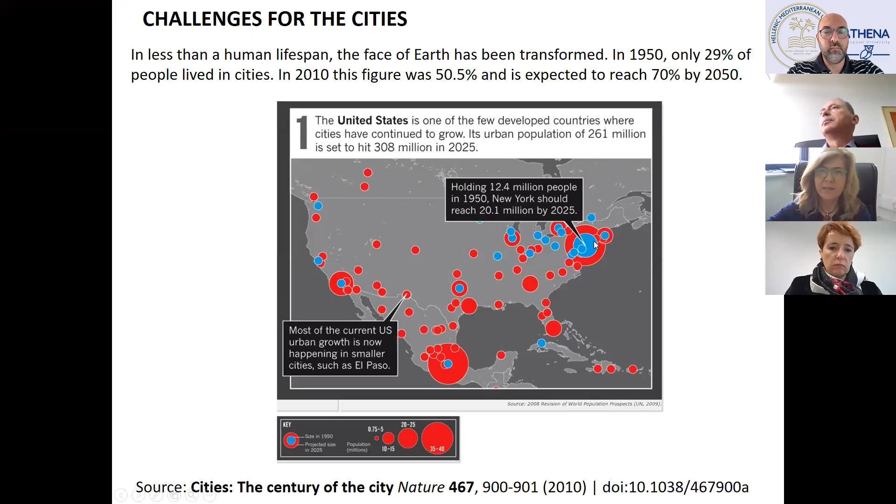I will start with the challenges that we face now in the built environment. First of all is the fact that in less than a human lifespan, less than 70 years, the face of Earth has been transformed. In 1950, only 29% of people lived in cities. In 2010 it was 50%, and it is increasing. You see here, for example, in the US, the blue areas are the cities that existed in 1950, and the red areas are cities that are expanding, showing how the existing cities have expanded in the last 70 years.

All these challenges for the cities create a lot of pressure on the environment. In 2006, the world's cities consumed 2/3 of the total energy used and emitted more than 70% of the energy-related carbon dioxide emissions. We expect this to rise in the upcoming period. So the challenges for the cities are very, very important.

And we saw that also in the COVID pandemic, how cities are affected. So how can we work for sustainably resilient cities?

We should ensure that cities and communities protect and ensure the quality of life, offer income and employment, economic growth, be inclusive and respectful of individuals, of their natural and cultural heritage, become also participatory and collaborative so people participate in the decision-making mechanisms for solutions and policies and services, also regenerative to provide affordable, sustainable and modern energy, support resilience to disruption and risks, and embrace cradle-to-cradle life cycle system thinking and circular economy.

So my presentation will have 4 axes. The first one is data, and how data affect buildings, cities and communities, and the work that has been done in the collection of data in the built environment. Also, the role of smart grids in the built environment and cities, climate change, and how nature-based solutions can provide a solution to the challenges that we face.

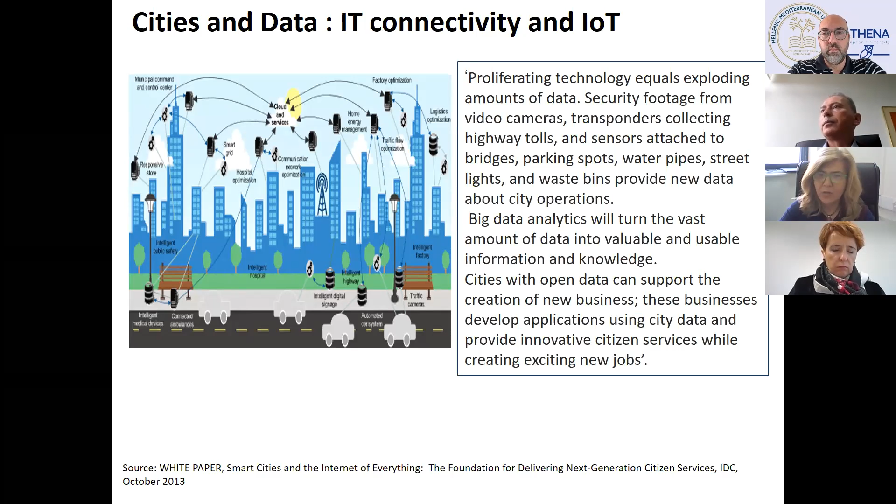Security footage from video cameras, transponders collecting highway tolls, and all the sensors now inserted in our city life provide new data about cities' operations, and new problems and challenges. Big data analytics will turn this vast amount of data into valuable and usable information and knowledge if we learn how to exploit it. This will support the creation of new businesses, and these businesses developing applications using city data will provide innovative citizen services and create new jobs.

To be more specific, I will start discussing the work done in a project called the Horizon 2020 project called Zero Plus. The aim of the project is to achieve nearly zero settlements, buildings in a small neighborhood, using advanced energy technology. There were three objectives.

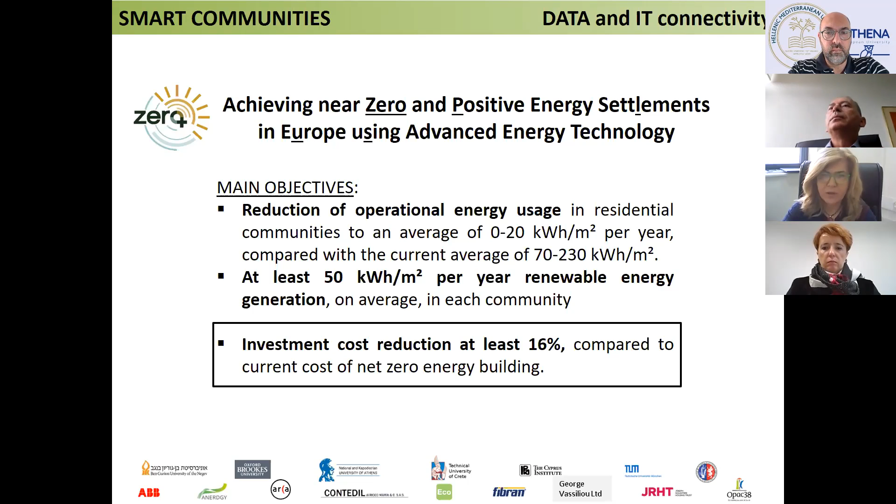The first is to reduce the operational energy of residential communities to an average of 0 to 20 kilowatt hours per square meter per year, compared with the current average of buildings of 70 to 230 kilowatt hours per square meter. At least 50 kilowatt hours per square meter per year of renewable energy generation in these small communities and buildings. And this to be done with an investment cost reduction of at least 16% compared to the current cost of new net zero energy buildings and communities.

For the role of data in this, we designed for this project an open WebGIS platform, not tied to a specific vendor, but using open tools. We have four case studies around Europe constructed in the framework of the project: one in Italy, one in the UK, one in France, and one in Cyprus. In Greece, we couldn't have a case study because the construction industry was affected by the crisis.

We have various measuring devices from various technologies that we integrate into this database. We have intelligent models, key performance indicator calculations, and these are also presented with a front end to the end users. I will talk about that in a few slides.

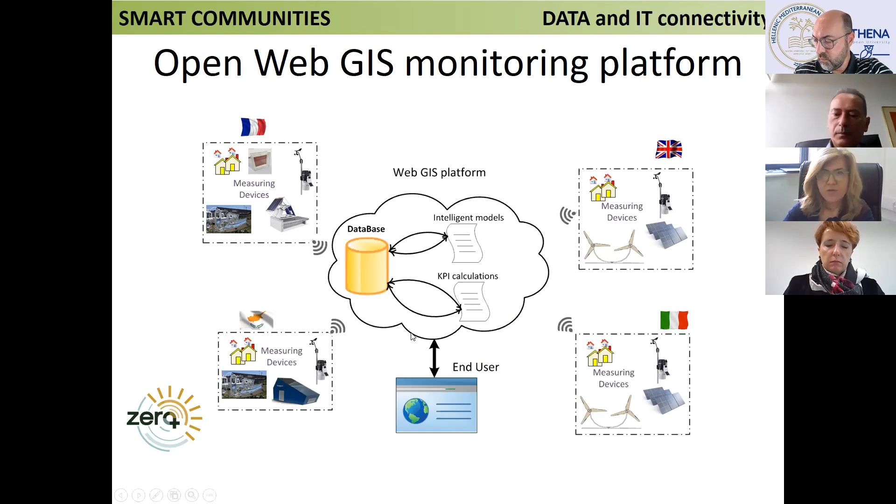What are the innovative technologies that we can include at the building and settlement level? First of all, we have advanced building envelope components, which in our case were a photocatalytic insulation put on the outside of the facade with photocatalytic components, and also some photovoltaics called SB Skin that produced energy from the facade.

Then we have energy production technologies, various aspects. For example, this is called the wind rail, which on top has energy production through photovoltaics but also exploits wind flow through a turbine included here. This is installed on a roof and is called the wind rail. Also, Linear Fresnel solar collectors and other technologies.

Then we have thermal energy storage using various systems. For the building sector, we have advanced heating, ventilation, and air conditioning systems, as well as smart controls and monitoring of the indoor environment. All of these are integrated into an integrated resources management system where we have the inverters, the distribution network, the microgrid, light control of outdoor lighting, and a low voltage distribution network using Wi-Fi to connect the outdoor environment with the buildings.

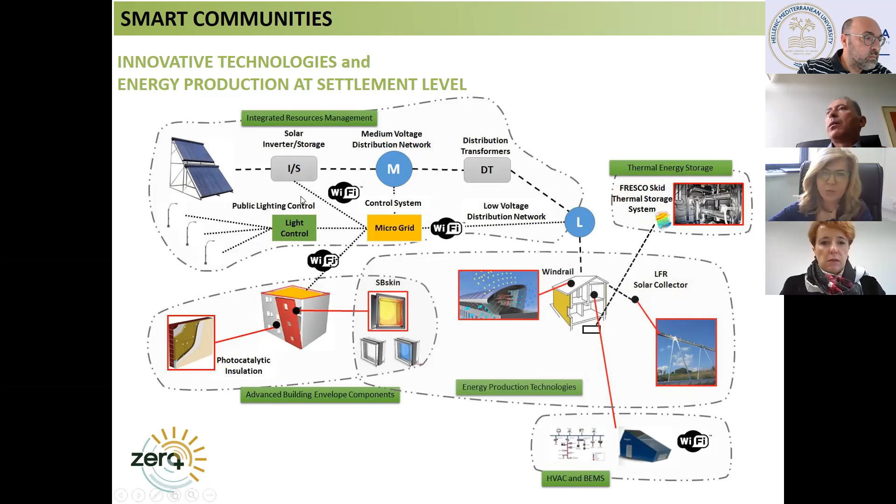To be more specific, you see here the SB Skin, shown in three pictures, which is a multifunctional building panel for energy saving and production in roofs and facades. It is patented as a high insulating glass block, so it has insulation in the back and small photovoltaic panels on the front. It comes in different colors and is modular, so it can be assembled in different ways.

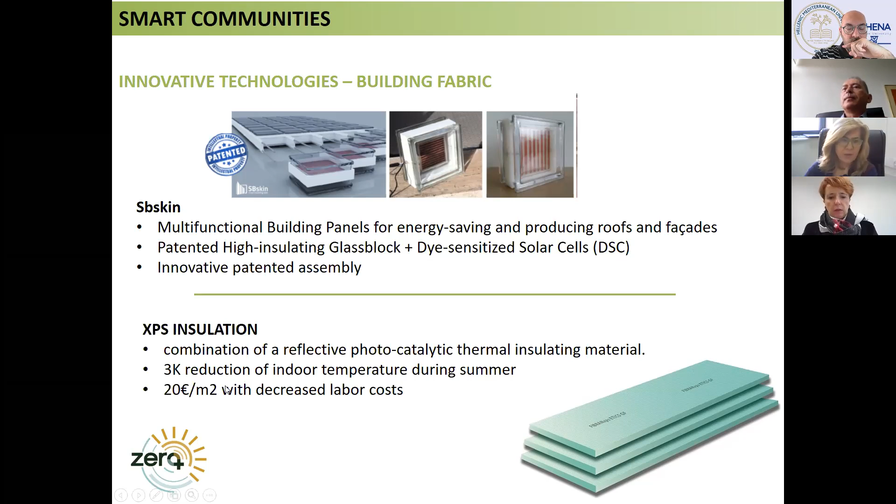This is also the XPS insulation, which combines a reflective photocatalytic thermal insulating panel. During summer, the indoor temperature can be reduced by at least 3 degrees compared to conventional building construction. This costs 20 euros per square meter.

I talked about that. This is a wind rail provided by a specific company called Anergy. As I said, the air moves through the system, there is a turbine that is moved and produces some amount of energy from the wind—although not much, it's very well integrated into the built environment. You also see here the roof and the photovoltaic, high concentrating photovoltaic production.

This is the Fresco, a desiccant and evaporative cooling air conditioning system designed for ventilation, dehumidification, and cooling in small scale applications. This was prototyped and tested by Enea, which is an Italian Ministry of Economic Development project.

The energy management also had Wi-Fi, smart controls of the environment, and ways to show the environmental conditions, interconnecting the systems with the users to provide information to them. All these are connected through the WebGIS platform.

At the settlement level, we have occupancy, temperature, electric loads, air velocity, magnetic reed contact doors, domestic hot water, and all these are connected with the WebGIS platform using a REST API application. We took various vendors and various systems and energy technologies and sensors.

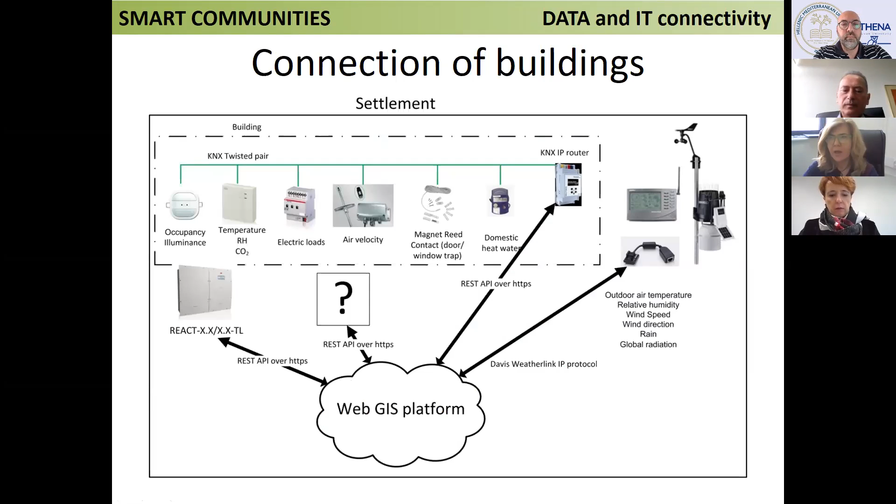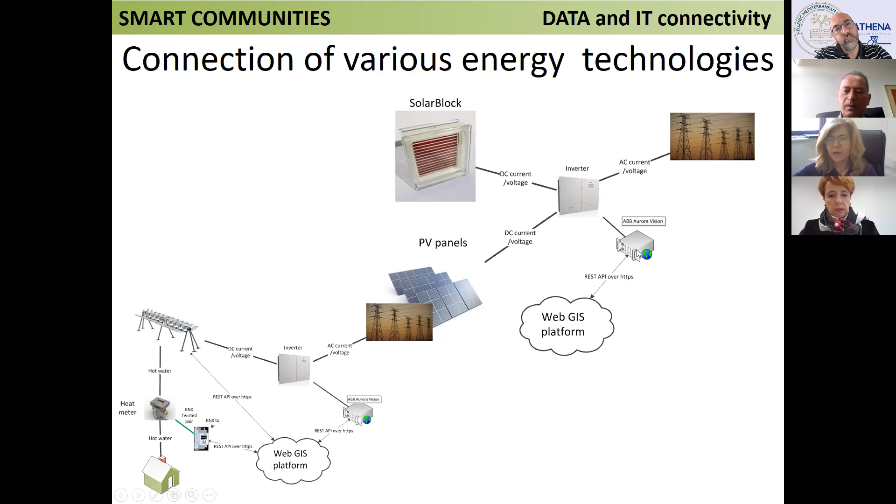We managed to interconnect them all to the WebGIS platform, so we have a global monitoring platform to collect all the data and compare it between the various case studies. The same happened with the energy technologies, with the REST API platform. This is the interconnectivity of the various energy production technologies, through the inverter with one connection, giving us interconnectivity with the WebGIS platform.

What we measured and what we calculated: first of all, we wanted advanced technology and advanced algorithms to predict the energy production and energy consumption at least 24 hours ahead, in order to be able to perform some adjustment of the loads.

For the energy production technologies, we measured the energy produced, the rejected energy not used by the settlement, the energy consumption of the various buildings, the global solar radiation, the wind speed, and the same for the other solar blocks, the photovoltaic insolation, and the photovoltaic panel data. All this is inserted in the database, calculated, and presented through a web browser to the users.

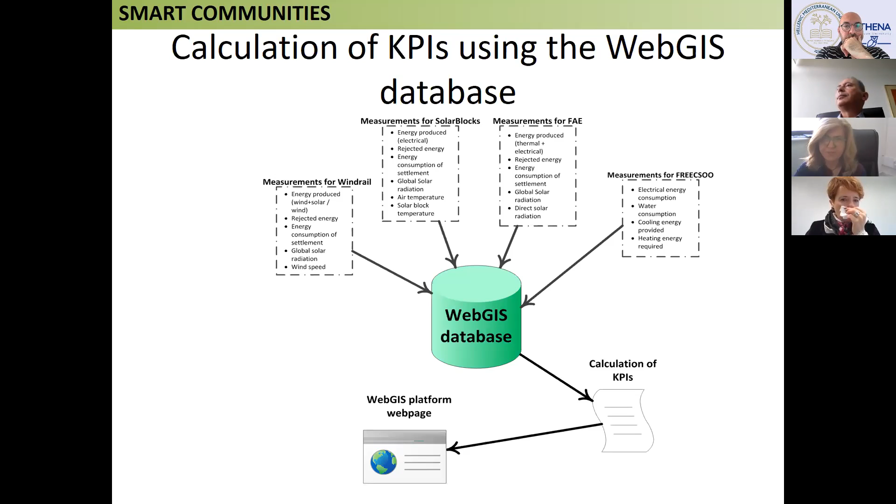We used GIS, although it was a big tool, because we wanted it to be expandable, to be able to include more settlements in the future, and also to use this platform for other projects and applications. I will talk now about one case study in Italy.

These are the two buildings, the area. These were constructed in the framework of the project—it wasn't existing, and we didn't just do retrofitting. These were constructed, which means we had to take all the permits, all the plans. It was very, very heavy work.

You see here the total floor area of the two residences, the net floor area, the orientation, two stories for the first one, one story for the second one, three bedrooms, and then the characteristics of the walls, of the roofs, U values, the windows, Ug, and the glazing we used, and manual blinds for the shading.

These are after construction. I have pictures also during the construction. You can see also on the website more information about that.

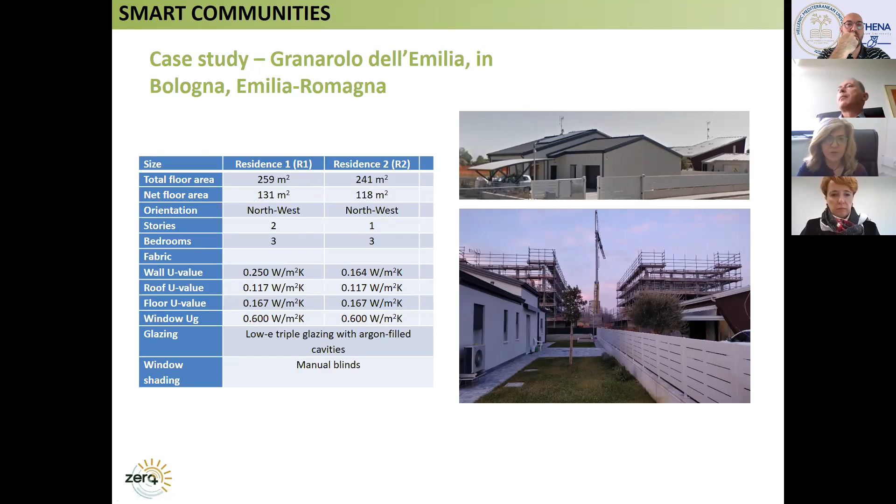So the technologies included dedicated greenery for local overheating mitigation, because we are in Italy, and we thought greenery would help reduce the outdoor temperature in order to reduce the energy consumption of the buildings by minimizing the difference between indoor and outdoor conditions, especially during summer.

We had PV panels, as explained in the beginning, XPS insulation, energy storage systems, load controls, and home energy management for building energy management. Not all technologies were used in all projects, because we had a lot of problems with permits and legislation. If you do a real construction, you have to follow the local legislation, standards, and rules.

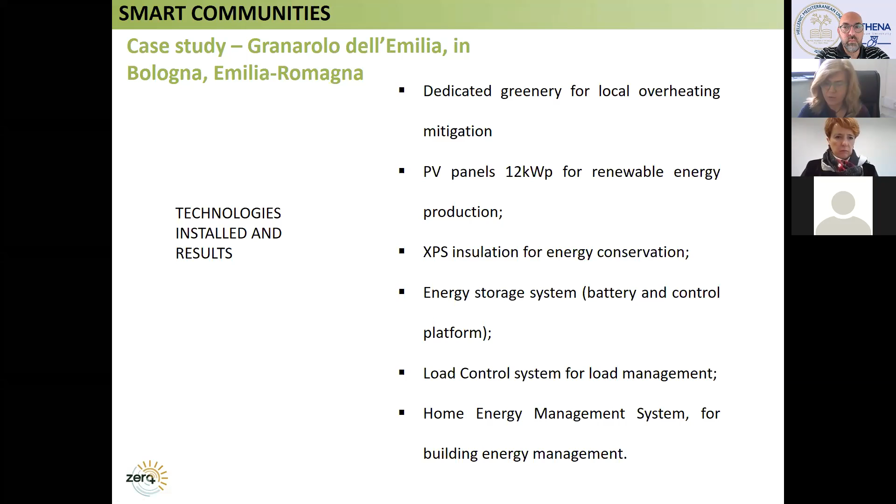So here is an overall graph of what happened to this settlement. You have here in gray all the settlement consumption.

You understand that during winter we have some more consumption. The PV settlement or the energy production of the settlement, of course, increased during summer, decreased during winter. That's why we have these differences in self-consumption also. The self-consumption is shown in this graph, and you see some points which are 62%, 62%, 51%, 63%.

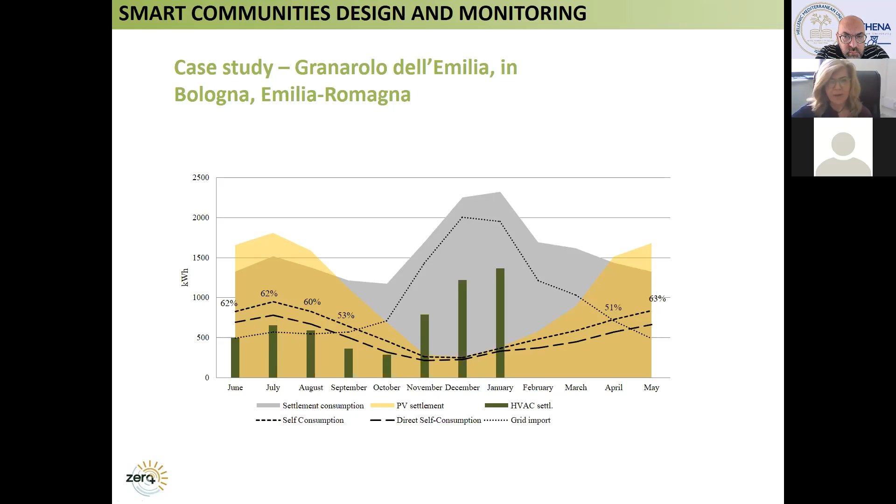Also, the grid import, the energy from the grid, is increased here, because here we see that the energy consumption of the settlements is higher than the one anticipated, or the one that we can cover by the photovoltaics. Based on this graph, you see we have also the results of the yearly based results.

So for the two residences, as designed, we had 50 kilowatt hours per square meter per year regulated energy. As built, 47.4 kilowatt hours per square meter.

Of course, you understand that we have to import energy from the grid, because at some periods the energy produced cannot cover the energy consumed, and to design for storage increases, of course, the investment cost.

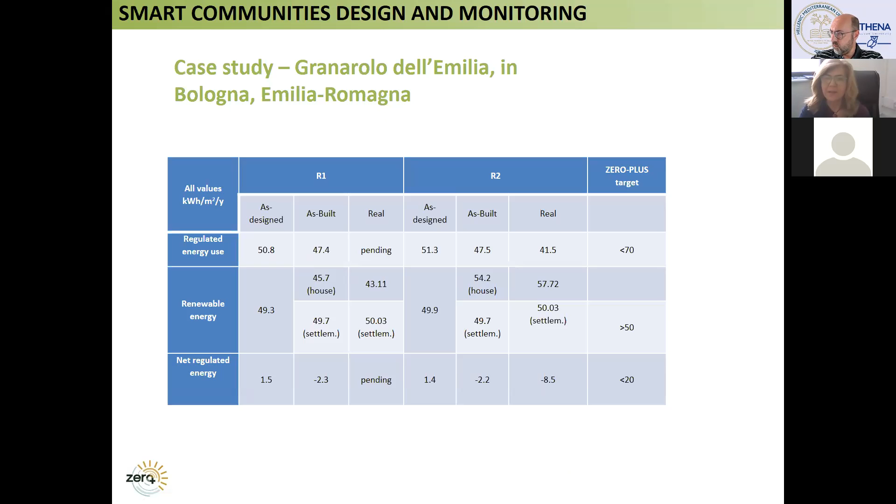And based on that, I will move to the second part, which is the smart grids, and what we've done in the framework of a Marie Curie project that was running in the last 4 years with a number of partners from all around Europe and also from Singapore. I don't know if we have to say a lot of things.

I know that a lot of people around here know what is a smart grid. Just for those that are not familiar, a smart grid is an evolved electricity grid that is not one-way communication, it's two-way communication, allowing communication between the user and the system back to the user. Also, it operates in a reliable and economic manner. It exploits information and computer technologies and facilitates integration of various technologies.

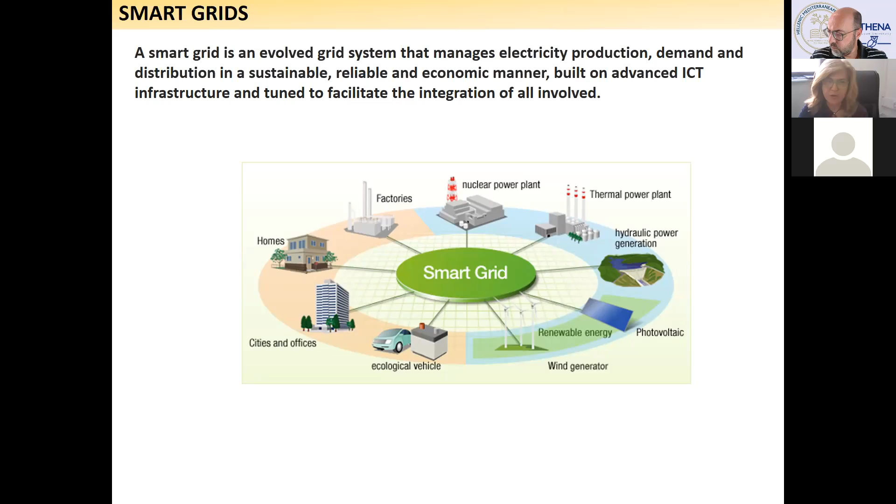So we had a strong collaboration between industry and academia to evolve this smart grid concept and to understand how things are incorporated in this smart grid concept.

To be more specific, we had 3 phases. In phase 1, we focused on smart and zero energy buildings performance and how a smart building provides data to a smart community, to a smart grid, and allows the two-way communication. Then we moved to a bigger cycle, to components, to a smart grid penetration to a community and a city level. And then in phase 3, integration of components to the development of smart applications and optimization of smart grid performance.

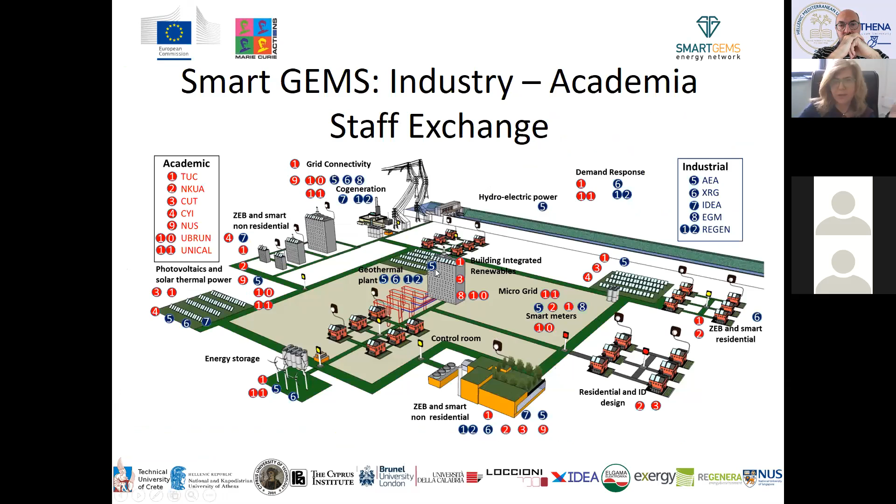Then we have a big installation of energy production technologies in Italy, in Palermo, where you see here the installation of linear Fresnel and other technologies that were exploited in this work.

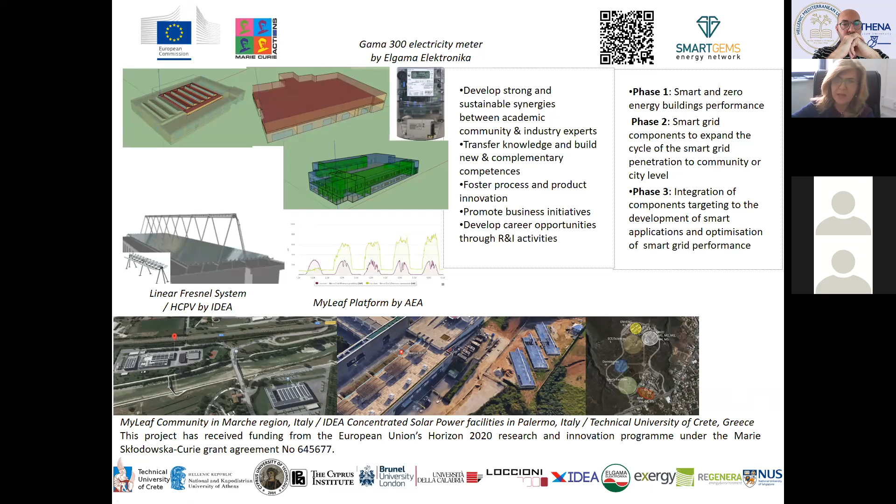We have some installations that were performed at the Technical University of Crete that I will discuss in my next slides more specifically. We had 3 main focus areas. People were visiting these areas, and we exchanged knowledge and ideas. We also saw a lot of things from the smart metering aspect using the expertise of our industrial partners.

About TUC: TUC expanded the infrastructure of smart metering, I think in 2017. There was 1 point of delivery in the beginning, so the connectivity with the grid was 1 point for the overall campus. We knew the consumption of the overall campus by that 1 point, but we couldn't know the breakdown of consumption in the various areas.

You see here how the smart metering was distributed. We have the production engineering management offices and laboratories, the sports facilities, the dormitories, the sciences and electronic and computer engineering department, our part, and also the mineral resources engineering department. There were 18 smart sensors installed that gave us a lot of input and a lot of ideas how to work.

We also managed to have a very good detailed infrastructure in the 2 buildings of the environmental engineering department, with a connection of temperature, relative humidity, CO2, lighting, and smart meters also in labs to understand more details, because it's our lab and we wanted more detail.

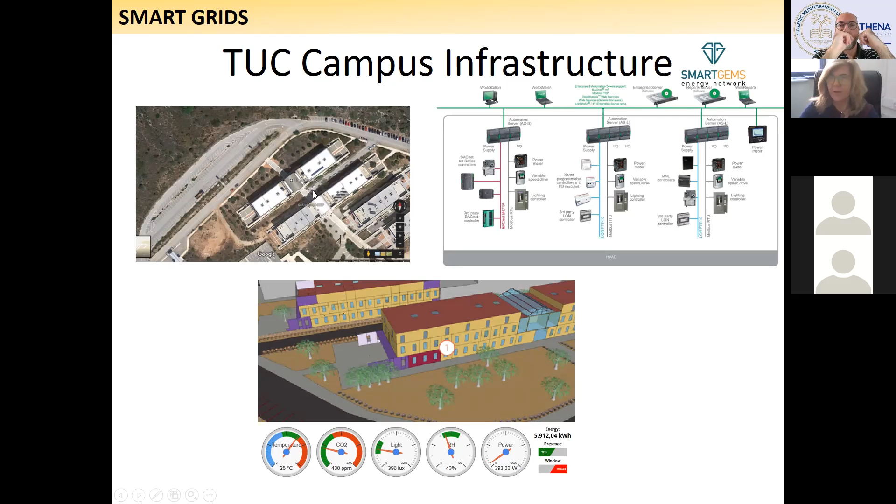We used these smart meters and the topology to perform artificial neural network predictions of the next day's consumption of the campus, and to see if demand response is possible, to minimize the energy cost of some buildings or facilities.

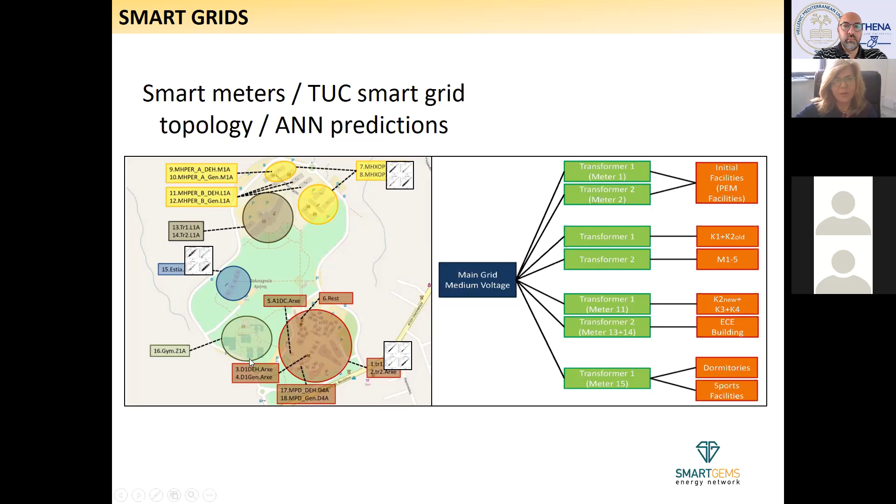You see here, for example, the data we used for training, which gives a very good fit, more than 90% R, and also very low distribution around the line.

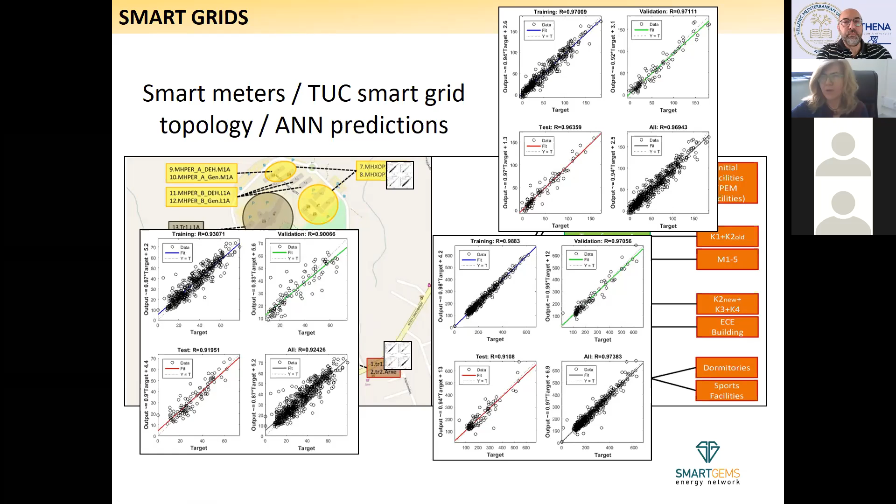Then after that, we performed a demand response algorithm. Demand response is a way to respond to the demand by minimizing various energy consumption items and respond to the cost of the energy. I won't go into the details, but we process the data, do the prediction, then optimize and evaluate the various demand response solutions, and select the one that gives reduced cost of the overall system.

So what we did is we took the district cost baseline, for example for 1 day in the summer, and did a bit of load shifting. We shifted the energy consumption to hours before and after the peak. This reduced the energy cost, and did not jeopardize the thermal comfort and the necessity of the energy requirements of the building. So the total energy consumption for the 2 cases is the same, but the cost changed for those 2 solutions.

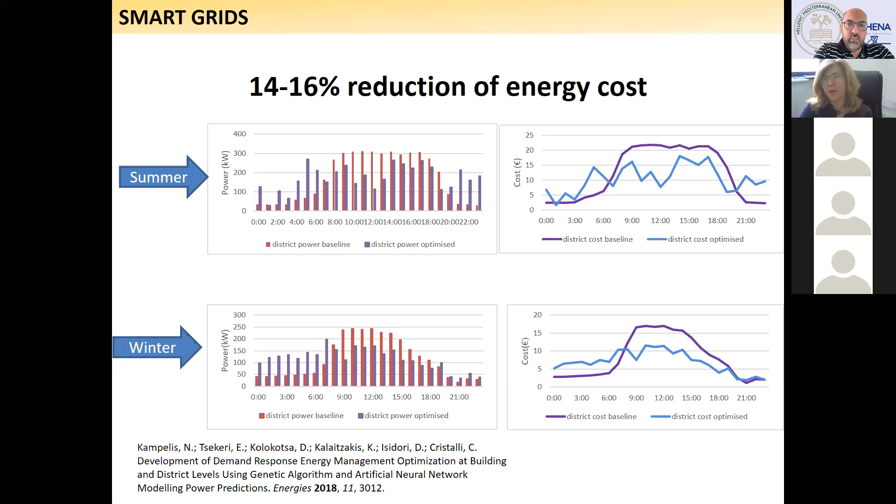Finishing with smart grids, I would like to talk about these climate change challenges, which are very, very important.

You see here a graph from January 2018. On one side of the earth we had Canada, the same day, with minus 27 degrees, and 47 degrees in Australia. It's amazing, the temperature difference and the air circulation around the earth on specific days.

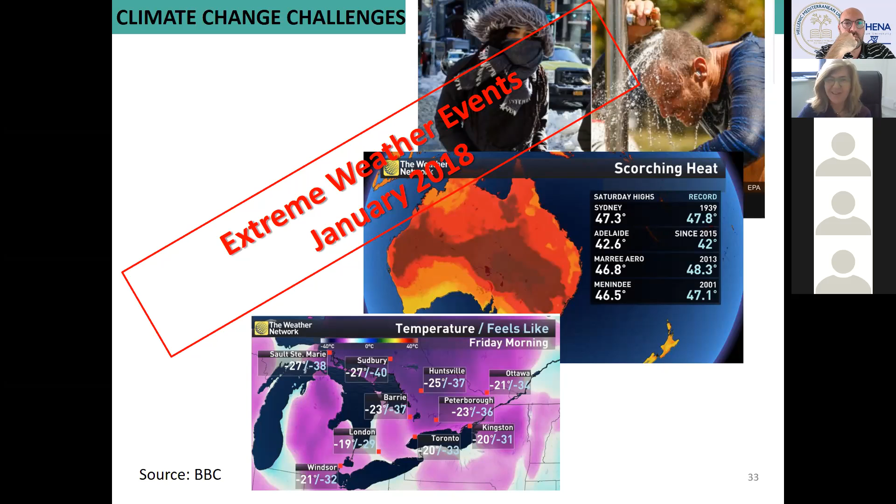One main aspect of this is that energy consumption in cities will increase because, although we try to mitigate climate change, we need energy for cooling. This is a problem not only for our areas, but now also for northern European countries at higher latitudes, because they're not used to this cooling requirement. They don't have air conditioning installations, just heating systems, and they suffer.

So a lot of people are working on how to integrate renewables in cities. Two works we've been looking at: one is how to include photovoltaic pavements, work we've done with colleagues from the University of Athens, looking at how to use photovoltaic panels and deal with dirt and other problems to integrate renewables.

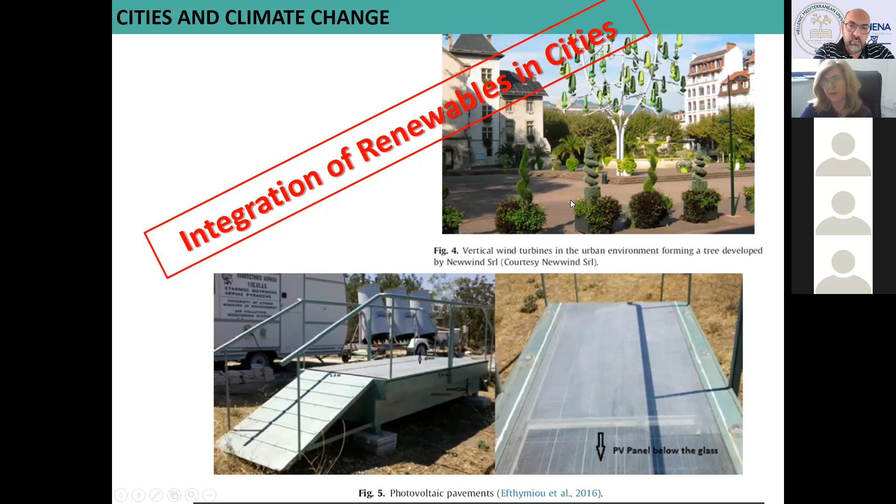The other thing is this nice tree that has small wind turbines as leaves, taking energy from these turbines and providing energy to the neighborhood without interfering with the environment, at least in my perspective, because this is also very subjective. Another thing we want to look at is urban allotments and urban gardens.

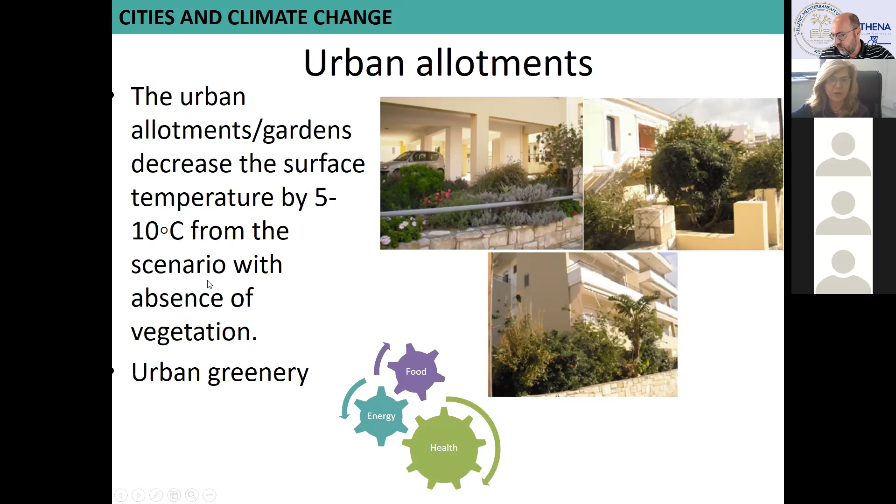Also, urban forest restoration is very important for CO2 sequestration, stabilization of ecosystems, urban heat island mitigation, and of course reducing energy demand for cooling.

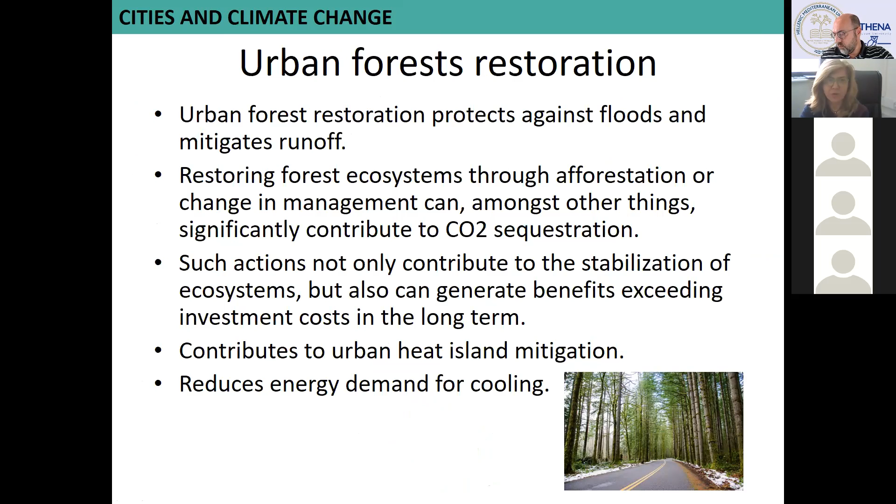Then we move to a very important aspect called integration of nature-based solutions. I worked on that over the last 3 years, in collaboration with my colleague Professor Nikos Nikolaidis. We started a project called ThinkNature, which is about the integration of technologies and projects and how to disseminate this concept.

So what is nature-based solutions? I use the European Commission definition: living solutions inspired and supported by nature that simultaneously provide environmental, social, and economic benefits and help build resilience, bringing more nature and natural features and processes into cities, landscapes, and seascapes through locally adapted and efficient systemic interventions.

We target, in my perspective—because there are others, like ecosystem restoration, which I'm not very familiar with—sustainable urbanization of cities. Here's a picture of Yanweizhou Park in Jinhua City, where you see the park when it's not flooding, and during floods, people can move in and around the city using these bridges, with water absorbed by the surface instead of flooding.

Is someone trying to say something? I heard something. All the attendees are muted, Denia, so it's probably on their end. Okay, sorry.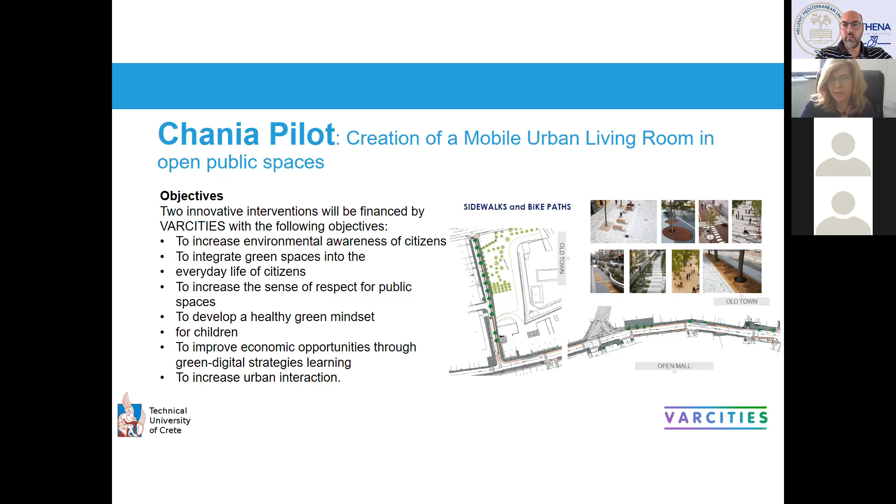The aim of the pilot in Chania is to increase the sense of respect of public spaces, to develop green areas for children and people, to improve economic opportunities through digital green strategies, and to increase urban interaction in these areas. You know that in Greece, if you do something stable there, you have to get a lot of permissions.

So we decided not to go that route, and instead go for a mobile urban living room. It's going to be mobile, moving around, so we won't need a lot of permissions for installation of an urban living room with local services.

So we are going to design mobile urban living rooms, and sensors on bikes and bike stations that will exploit these bike sensors to measure air quality or various parameters that influence the health and comfort of people.

How this idea came up in Chania: in the previous project, we had a summer school, I'll give you some idea because this is very interesting. This was the summer school we did in September 2019. We had people from 20 countries, 40 people. We had a lot of work and a lot of fun, as you see - that's what usually happens in summer schools. We gave them the Chania city as a case study.

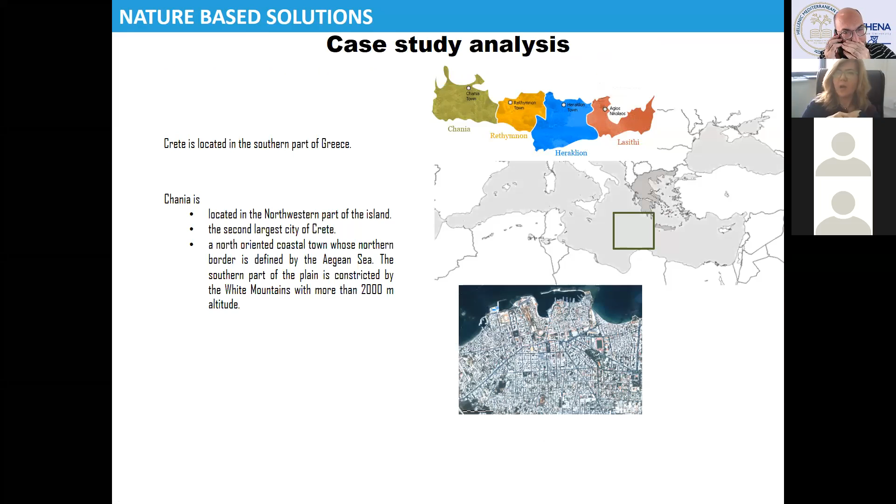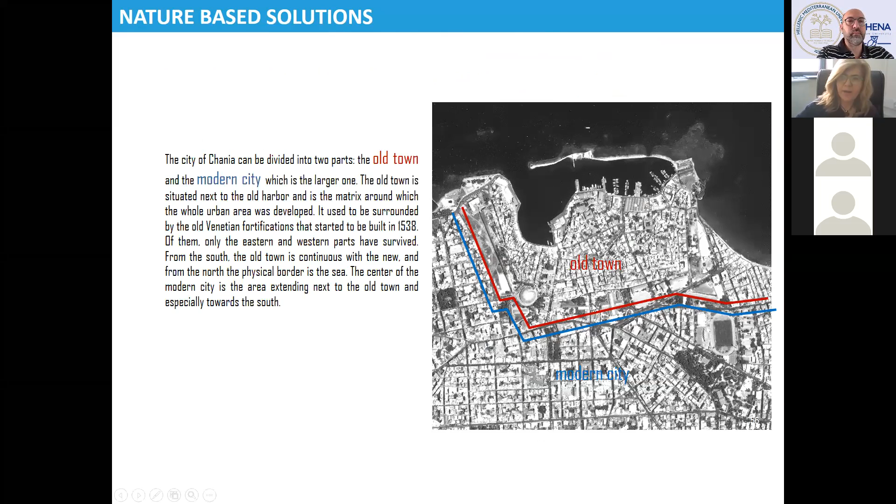We explained the orientation, we had a lot of walks around the city, and explained the problems. Here you see how they call them, the fortifications - the Venetian fortifications and the Byzantine fortifications, and how the old town is separated from the modern city. There are problems with the small areas in the old city, and of course you cannot change the facades.

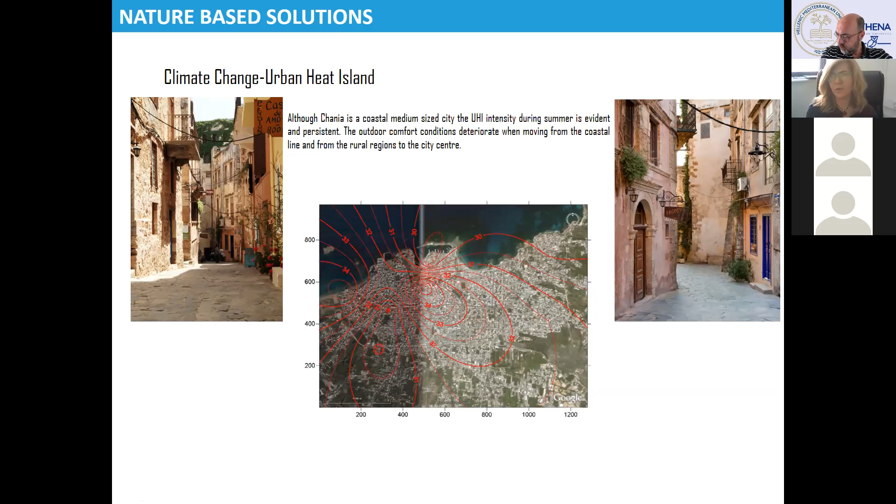We had some measurements in the past showing we have an urban heat island phenomenon in Chania, because in the center the temperature sometimes reaches 6 or 7 degrees difference compared to the peri-urban areas. You can understand that if you take your car from the center of the city to the university here in Kounoupidiana, you feel the temperature difference very easily.

We also gave them information from a climate change disaster - extreme weather conditions in early February 2019. You see here very nice images from this event. We had 596 millimeters of rain in 2 days. Routes were destroyed - you see images here from the old city harbor, from the beaches, from various areas, and also floods and all these problems.

We asked these people to give us some ideas, because they are fresh minds, they don't live here, some ideas of what can happen. One solution was the Fibonacci vision - they gave us this very nice picture, which is a Fibonacci spiral, starting with blue solutions from the outside and green solutions inside.

They suggested having some reef balls and living shorelines to mitigate the floods and the energy that comes into the harbor, and of course increase greenery in a very smart way that does not affect the historical concept of the city. You see here some ideas from other cities, also some pavements and some ideas.

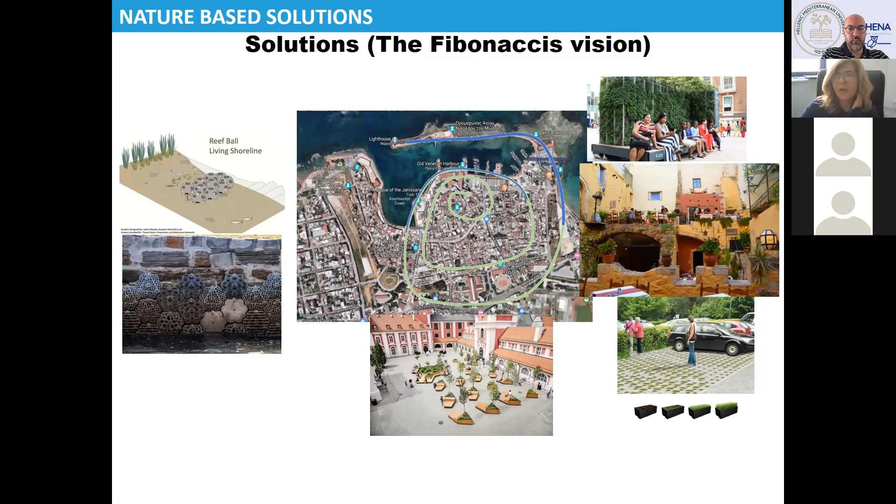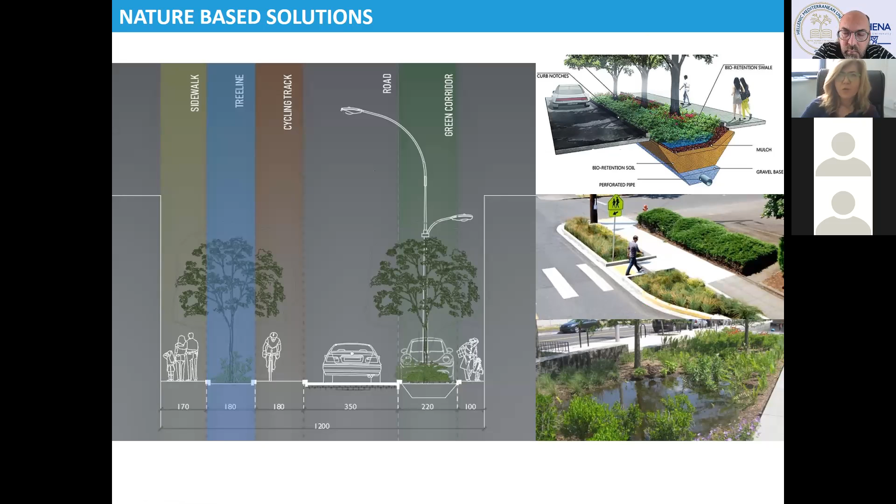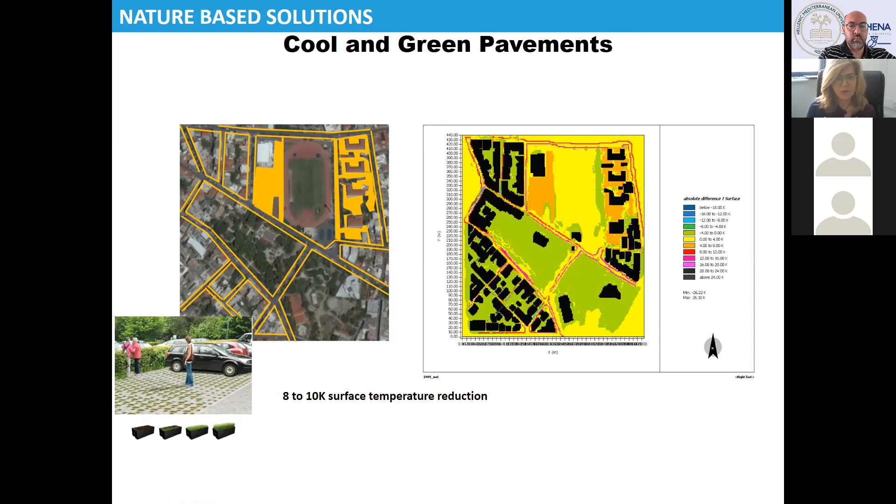Then we modeled the solution a bit using ENVI-met. We have here the average temperature and wind speed we used for Chania. We took some spot lines around the city and tried to see what would happen if we incorporate small green aspects, and also some new pavements that have increased reflectivity and do not absorb the heat.

These areas are not necessarily areas where something should be done, but areas that we selected. Here you see there is some greenery, but during this period, there's no shade at all. If you have shade, the area is much more pleasant, and you can walk, stay, and communicate with other citizens and people in the city.

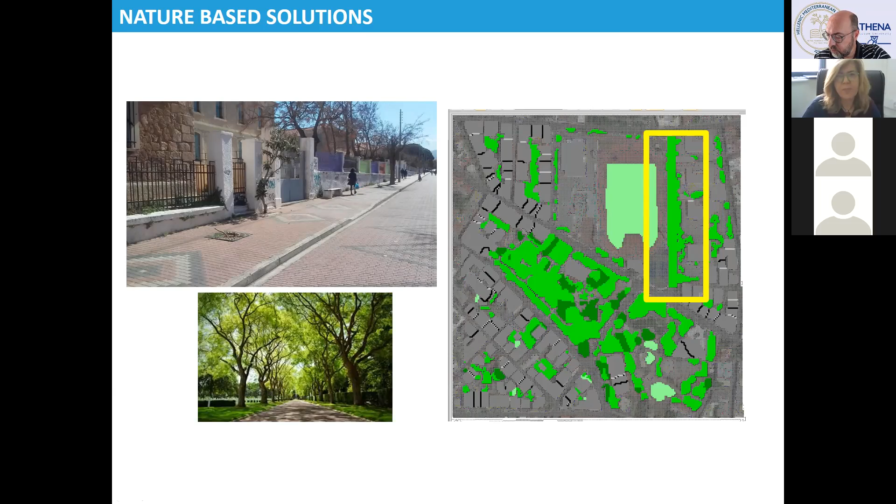With all these solutions, we realized that the surface temperature reduction is 12 to 17 degrees. Of course, it's not something we suggest to be done, but ways that we started thinking about solutions. What we are going to implement is urban living rooms, which we decided together with the municipality of Chania, and we got this funding from the VARCITIES project that I mentioned earlier.

So with that, I conclude. I would like to thank you for this opportunity, and I'm open for your questions and comments.